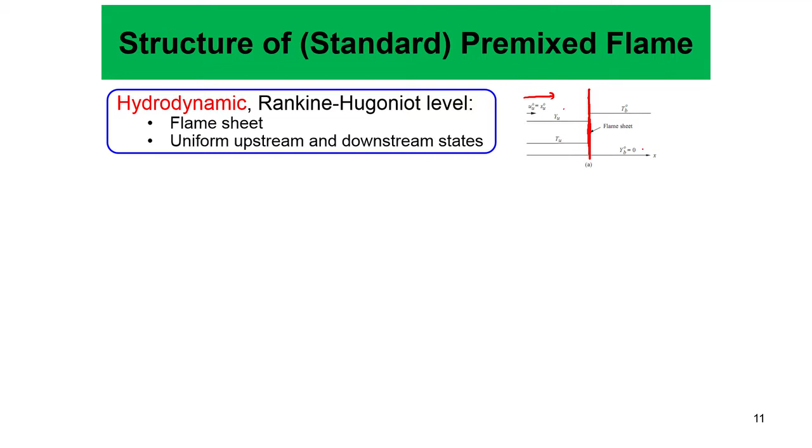Okay. So, it means that we are viewing the flame from a very far distance, where we are not really looking into what happens inside this sheet. But then if you put a magnifying glass and zoom into this sheet, you see that the sheet essentially has a finite thickness. It has a diffusion zone or a preheat zone where the temperature actually increases. So, if this is the unburnt gas temperature, this is the burnt gas temperature, and there is a region where the temperature sharply increases. This diffusion zone is characterized by LD0. Okay. And the reaction zone is essentially frozen due to the large temperature TA, and we again consider this reaction sheet limit, where the reaction happens over a very small distance because of the large activation energy that we have already seen.

But there is also a mass diffusion zone where the species does not change abruptly, which is not possible in reality because everything has to change in a gradual manner. It only depends on the perception of length scale. So, when you zoom into this flame sheet, you see this preheat zone and the diffusion zone, but our zooming capacity is still not enough to look into the reaction sheet. But if you zoom in further, okay, you will see that there is also a reaction sheet which also happens over a small and finite distance or finite length.

So this additional reaction zone, this LR, which is this thickness, that is where the temperature increases like this, and the species decreases like this. This is where the reaction is peaking, and that happens over a length of LR0, and LR0 is because it is standard conditions we are considering, and this is the LD0.

So this is the flame structure, the 1D flame structure in the x direction. Of course, in a gas turbine engine you can have a flame like this, these are the swirlers. You can have a flame like this in an actual gas turbine combustor. So basically, if this is our x direction...

Here what we will see is that whatever happens in this thing essentially happens like this: the temperature increases like this, the species decreases like this. So we need to understand this flame structure to know how the flame structure in an actual engine behaves. This idealized version is very important, but understand that this flame structure can be considered as a building block or an element of the complicated flame structure that happens in an actual engine, just like the chambered flame is an element of the complicated flame structure that can happen in some other non-premixed combustors. So this type of understanding is very important.

But even without going into the details, we can now understand that because the activation energy is very large, your LR0 must be much smaller than LD0. So this is one important thing.

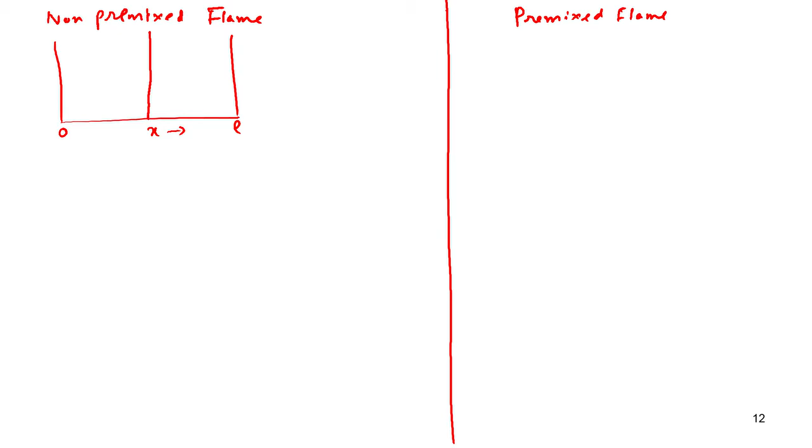So then we need to understand the difference between the temperatures for the non-premixed flame and the premixed flame. If we consider the non-premixed flame on the left hand side, and on the right hand side we consider a premixed flame, the non-premixed flame was like this, both are 1D variations. This is 0, this is L, this is X. The flame was somewhere here. This was your temperature T0, TL. This was YF0, just the previous thing that we did.

Nothing can survive, no fuel. This is the fuel mass fraction on the left hand side, because it can contain some inert nitrogen also, and no fuel can survive beyond the flame. This is the flame location XF, and this was your YOL, the mass fraction of the oxidizer on the right hand side.

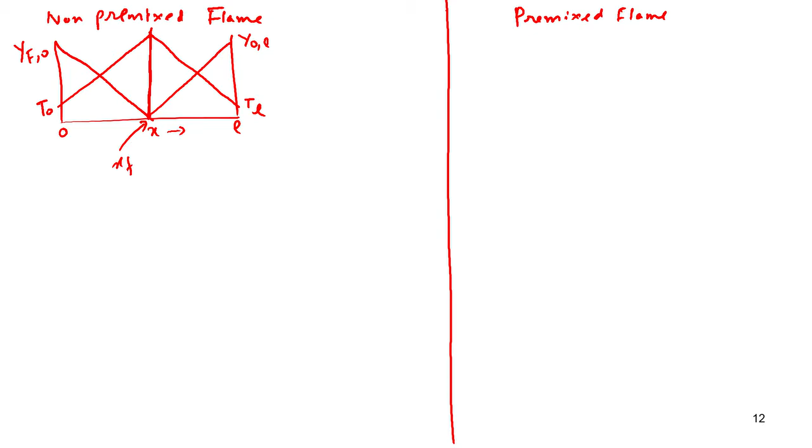And these things were linear because it was just diffusion controlled. By coupling function, this becomes the solution of the Laplace equation, del-squared beta-i over del-x-squared equal to 0, and the temperature formula that we obtained was this.

Okay, so what happened was that this was the heat release, and this is a fuel mass fraction. So if we consider 1 kg of fuel mixture, this was the amount of heat release.

So this is what we had obtained exactly in the previous class. As a result of this TF, what we obtained was the adiabatic stoichiometric flame temperature for the system. Okay, so now if you say that YF0 is equal to 1.

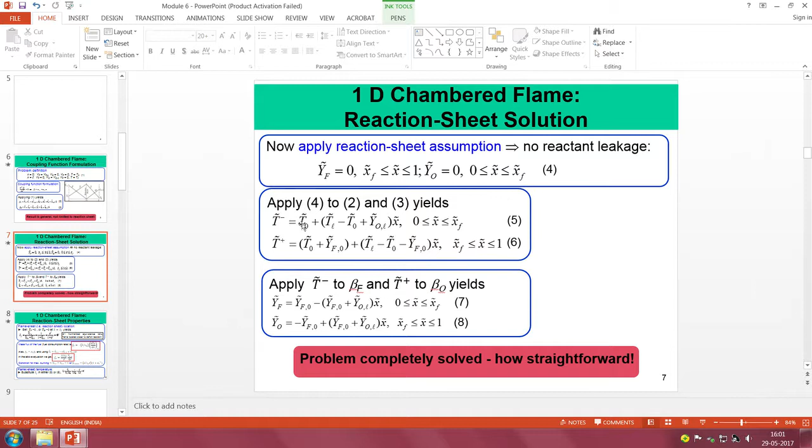Just to show you back, this is how we obtained this. If we just go back to the previous class in module 6, this was the thing that we obtained. This was the temperature equation that we had. And then when we substituted this thing into the XF that is here, that is the XF value that we obtained here, this is the temperature formula that we got.

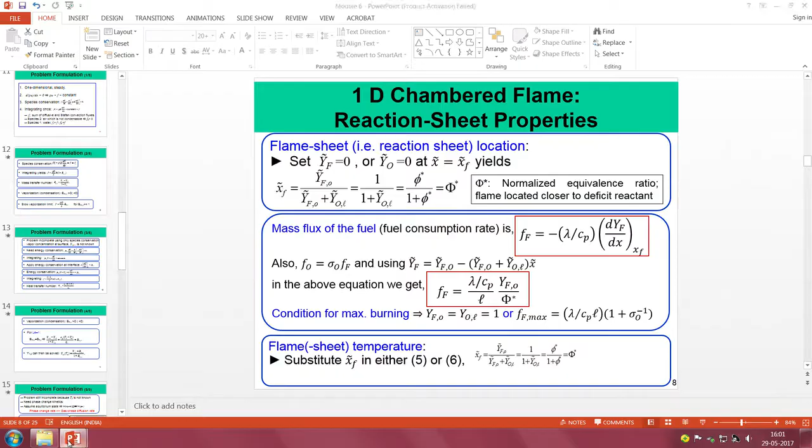And this thing was exactly the amount of air. This is we obtained in this manner. I'll just go briefly over this because this was so important, that is 1 kg of fuel air mixture contains...

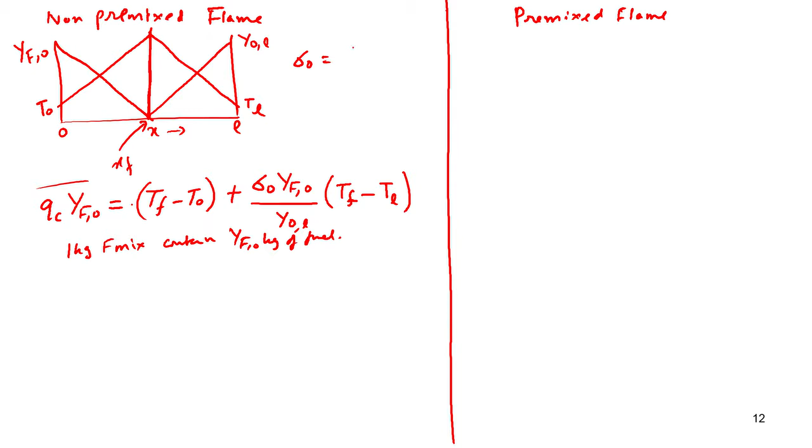YF0 kg of fuel, right. Now for stoichiometric burning, whereas this sigma 0 was nothing but W0 times nu 0 double dash minus nu 0 dashed, divided by Wf times nu f double dashed minus nu f dashed.

So for stoichiometric burning, W0... 1 kg for stoichiometric burning, sorry, this is Wf times nu f double dashed minus nu f dashed kg of fuel needs this W0 times nu 0 double dashed minus nu 0 dashed oxidizer, oxygen, right.

So YF0 kg of fuel needs W0 times nu 0 double dash minus nu 0 dashed, divided by Wf times nu f double dashed minus nu f dashed, kg of oxygen times YF0, right. So this is nothing but, for stoichiometric burning, YF0 kg of fuel needed sigma 0 times YF0 kg of oxygen, right.

Alright, so as a result, this thing was exactly the amount of oxidizer mixture, that is air, required for stoichiometric burning. So you see, if we just remove all these things, the thing which comes out is that this heat release goes on to support heating up 1 kg of fuel mixture and exactly the amount of oxidizer mixture required for stoichiometric burning of this fuel mixture. So the burning that is happening is stoichiometric. So when the burning that is happening is stoichiometric, then the flame temperature reached is nothing but the adiabatic flame temperature.

So here the most common situation is that the fuel does not contain nitrogen, say it is pure fuel. So here this QC is equal to, then it means your YF0 is equal to 1 if it is pure fuel, that is there is no oxidizer, but of course the air will contain some nitrogen. So then it means essentially QC is equal to TF minus T0 plus sigma 0 by YOL times TF minus TL, right. So this temperature thus obtained is the phi equal to 1 adiabatic flame temperature. It is always at the peak, this flame temperature.

On the other hand, if you consider the premixed flame, that is this structure, this is your flame sheet, this was also your flame sheet where your XF here is. So here your fuel and oxygen mixture are premixed, right, and this your fuel mixture is YU. 1 minus YU is equal to essentially your air mixture or the oxidizer mixture like this, okay, and your species is reducing like this. Here is your flame sheet, okay, thin.

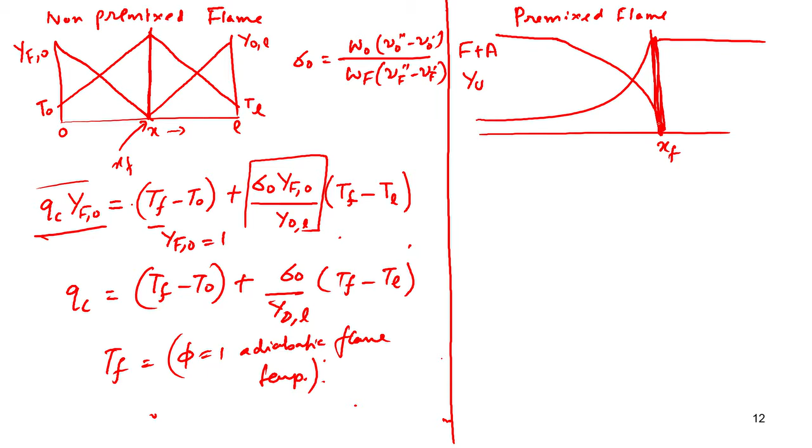So here the temperature thus reached is Cp times (Tf minus Tu), or we call it Tb minus Tu, which is equal to QC times YU.

Now on this side, YF0 you could set to 1 whenever there is no nitrogen in the fuel, which is most likely the case. Then the fuel mass fraction equals 1, pure fuel going out. So with pure fuel, the flame temperature is the phi equal to 1 adiabatic flame temperature. But this YU here can never be equal to 1. The reason is that 1 minus YU equals your mass fraction of the oxidizer, or the air. YU can never be 1 because this is mixed with the oxidizer. So it is always less than 1.

As a result, this temperature is still the adiabatic flame temperature because there is no heat loss. But this is the adiabatic flame temperature at a given phi, which is a function of your YU.

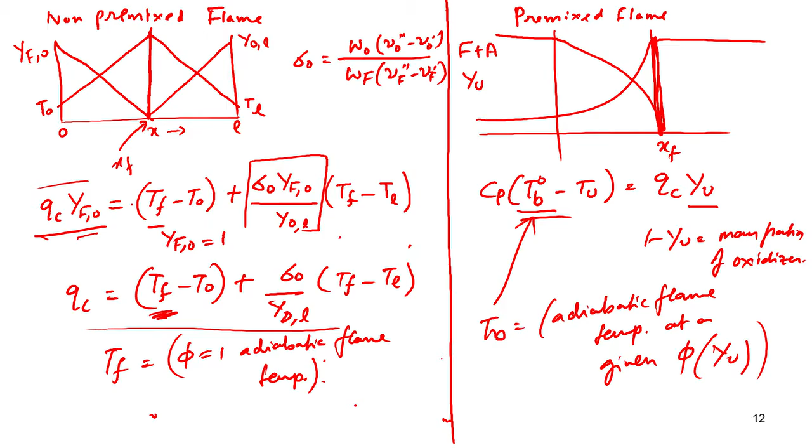So depending on the equivalence ratio, you can essentially control your TB or TB0. That is the difference here: you cannot control TF. TF is always the stoichiometric adiabatic flame temperature as long as it is a pure fuel. On the other hand, here just by changing the stoichiometry, putting in less fuel or more air, you can control the flame temperature.

That is why premixed flames are very attractive in engineering applications. It allows you to engineer the flow inside, or engineer the product composition and the product temperature, because temperature is very important.

You have seen that when you consider thermal NOx production in the Zeldovich mechanism, this N2 could only be split up at very high temperature. So vice versa, whenever there is high temperature, this N2 can be split up by oxygen.

So to reduce emissions, unless there are other pressing needs, you always want combustion to happen at a temperature of about 1600 to 1700 Kelvin. You can readily do that with a premixed flame, where you just control the equivalence ratio and get the low temperature.

Of course, there are challenges associated with it, like flame stability and thermoacoustic oscillations that we have to deal with. But unlike in a non-premixed flame where you cannot control the adiabatic flame temperature, here, as long as your fuel is pure but mixed with air, giving in less fuel gives you less temperature. You can appropriately control the flame temperature, and also control things like emissions. So that is the advantage.

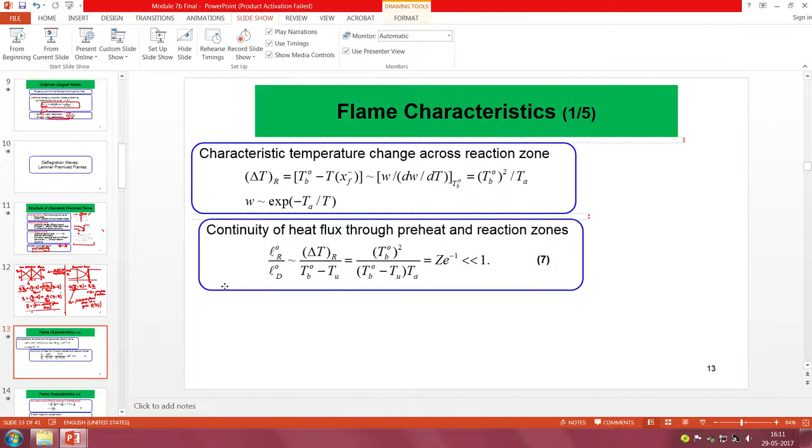So then we go into the flame characteristics. One very important characteristic to note: if we consider the premixed flame structure, where the reaction zone has temperature TB0, this is your TU, this is your LR, and this is your LD, LR0, LD0. If we want to find the relation between LD0 and LR0, we want to find LR0 by LD0. So we have to find out what LR0 is.

We go into the simpler description, the flame sheet limit, where we consider there is a finite thickness but we do not resolve the structure. So this is your LD0, this is your LR0. By similarity of triangles, this is your TB0 and this is your T at XF minus, which is just prior to the flame, and this is basically your reaction zone.

So the temperature after combustion reaches the burnt gas flame temperature, which is the adiabatic flame temperature at that given equivalence ratio, with a small thickness which is the reaction zone thickness LR0, and just before the reaction zone the temperature is slightly smaller than TB0. So we need to find the ratio of LR0 by LD0, the reaction zone thickness to the diffusion zone or preheat zone thickness, by applying similarity of triangles.

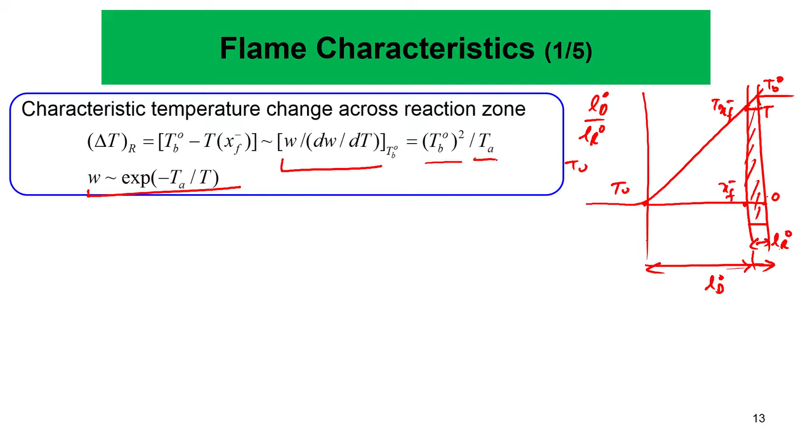That is W is proportional to e to the power of minus TA by T. We will consider that we just take this derivative and find that it essentially becomes the ratio of TB squared divided by TA, whereas TB is the burnt gas flame temperature and TA is the activation temperature.

So we can just find this out, and then we apply this thing, that is LR0 by LD0 is essentially delta T across the reaction zone divided by delta T, TB minus TU, and then we substitute this here, and we get LR0 by LD0 is essentially equal to TB0 squared divided by TB0 minus TU, times TA, whereas this thing is a very important quantity.

And that is called the Zeldovich number. So this guy is called the Zeldovich number, and it is a very important quantity, and the Zeldovich number is always very large. You see that in the bottom you have a very large quantity which is TB0 squared.

On the numerator you have TB0 minus TU, which is proportional to TB0, but since TA is much larger than TB0, the activation temperature is much larger than the burnt gas flame temperature, which comes from kinetic considerations, that's why your activation temperature should be large, because only a small fraction of the molecules should be excited to start the reaction. So this TA is very large, and they should have a very large energy, and as a result the Zeldovich number is very large.

The inverse of this is much greater than 1, whereas 1 by Zeldovich number should be much less than 1. So essentially we see that LR0 by LD0, which is equal to 1 by Zeldovich number, should be much smaller than 1. So this is the consideration that LR0 by LD0 should be much smaller than 1.

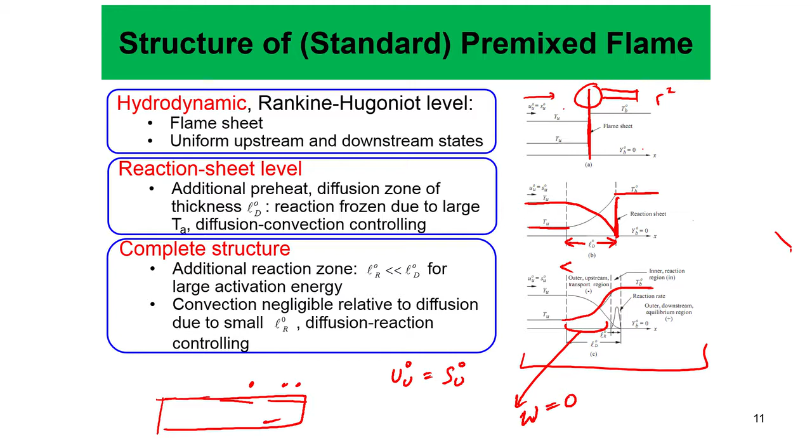Now we can go into balance of the diffusion and convection, and the diffusion flux balance in the preheat zone. You see that in this structure, in this zone of LD0 there is no reaction, W equal to 0, and in this region this is how the temperature increases. So in this region we can consider the reaction rate, the species-independent reaction rate or the species production rate, that is equal to 0.

So that is equal to 0, and this is just like the previous relations that we used while deriving the coupling functions, because even the flame essentially means reactions, but because the activation temperature is very high, as a consequence your Zeldovich number is very large, and as a result your reaction zone thickness, that is LR0 where the reaction happens, is much smaller than your preheat zone thickness. So in a lot of flames, under this assumption there is no reaction happening, it is only balance between diffusion and convection.

So if there is balance between diffusion and convection, we can consider this equation, the one dimensional temperature equation, which is F0 times Cp dT/dx minus lambda d2T/dx squared equal to 0. Then if we do an order of magnitude analysis, we say that this is represented by F0 Cp, where this happens is essentially delta T, which is equal to Tb minus Tu divided by LD0, that is the diffusion length, and that should be proportional to or have the same order of magnitude as lambda times delta T divided by LD0 squared.

Okay, then this cancels, and your LD0 is nothing but lambda by Cp times 1 by F0, or your F0 is nothing but lambda by Cp times 1 by LD0. So this is a very important relation, that F0 times LD0 is essentially proportional to lambda by Cp, which is your thermal conductivity divided by specific heat.

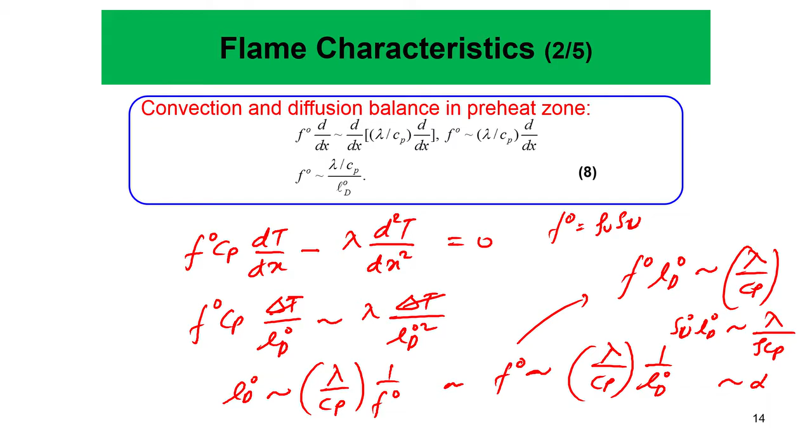Of course, F0 is essentially equal to rho u times SL, so you can also write that SL0 times LD0 or SU0 times LD0 is proportional to lambda by rho Cp, which is essentially equal to thermal diffusivity. So SU times LD0 is equal to constant, equal to thermal diffusivity, and that arises just from the fact that in the preheat zone it is just a balance between convection and diffusion, and there is no reaction at that place.

So that is the consideration with which we arrive at this. Now, whatever flux F0 goes in through this convective-diffusive zone, that must also be reacted. So if you remember the dimensions of the reaction rate, we can also relate your F0 essentially to the WB0, the species production rate at the burnt gas temperature, times LR0. That is how you dimensionally connect F0 with the reaction rate.

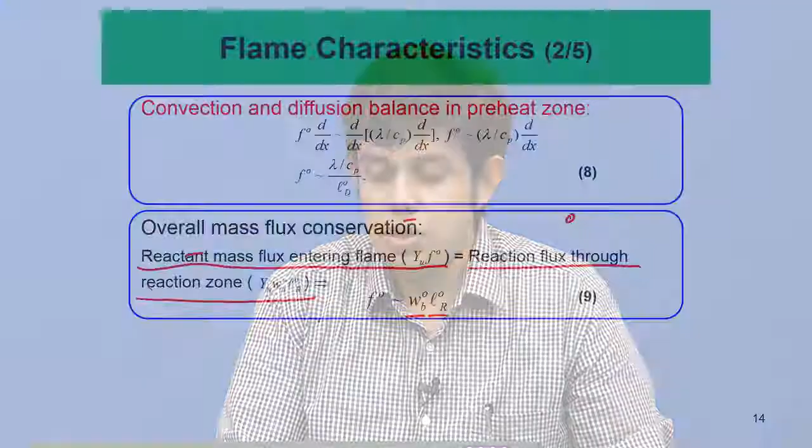So the assumption is that the reactant mass flux entering through the flame, that is Yu times F0, is equal to the reaction flux through the reaction zone, which is Yu times Wb0, because that is the species consumption rate, times LR0. When you equate these two, Yu times F0 equals Yu times Wb0 times LR0, this cancels, and your F0 is nothing but Wb0 times LR0.

So now what you can do is relate this guy with this guy. What you can do is just multiply these two things, and you will get F0 squared is equal to lambda by Cp times Wb0, that is the reaction or species production consumption rate at the burnt gas temperature, times LR0 by LD0.

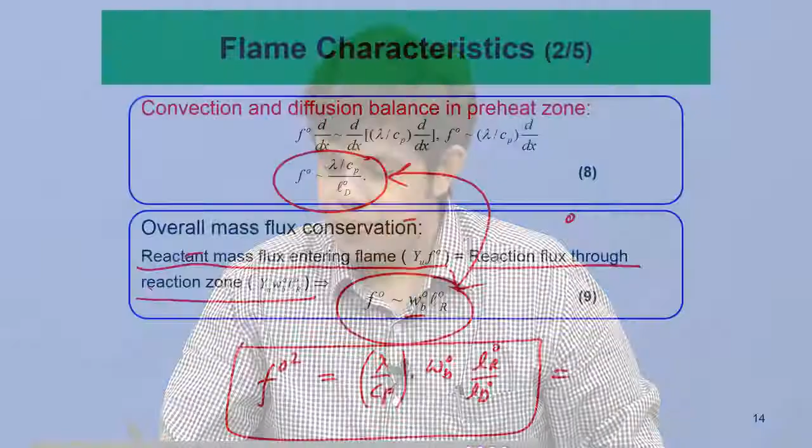This is a beautiful relationship that emerges, by very simple considerations, just by considering the species flux, just by assuming that the species flux that travels to the preheat zone, that is the convective-diffusive zone, also has to be consumed in the reaction zone. So from that this relationship emerges, and do you see what it is? This is nothing but lambda by Cp, the thermal diffusivity without the density, times Wb0, and LR0 by LD0 is nothing but 1 by Zeldovich number.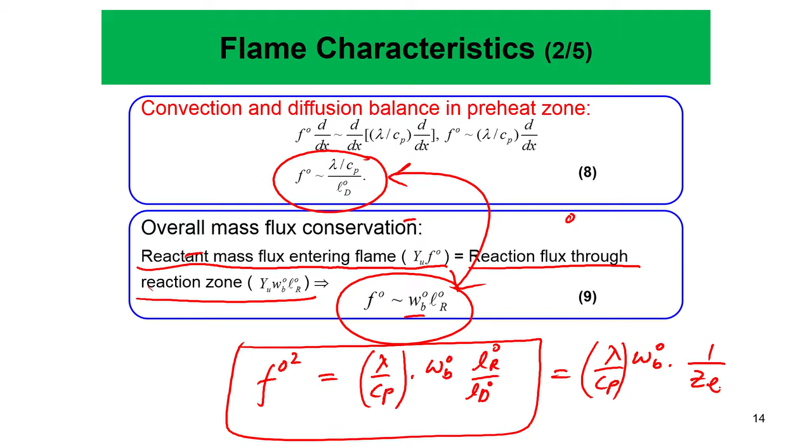So then this emerges, that your F0 squared, the burning flux squared, is essentially lambda by Cp times Wb0 divided by Z, the Zeldovich number, or you can write it as F0 is essentially square root of lambda by Cp times Wb0 divided by Zeldovich number to the power of 1/2. So here you get plenty of information about premixed flames.

That means F0 is essentially the geometric mean of lambda by Cp and Wb0. So it means that in a premixed flame, lambda by Cp and Wb0 are both equally important, both diffusion and reaction are very important, and that is why the premixed flame is much more sensitive to chemical reaction mechanisms and everything.

Whereas in a diffusion flame, which is basically diffusion controlled, you have seen that F0 is essentially proportional to lambda by Cp. In a non-premixed flame, or in a chamber flame, you have seen that it was proportional to lambda by Cp times the velocity, the species gradient, etc. But here it has r to the power of 1, here it is to the power of half.

So of course here the importance of diffusion has gone down at the cost of chemical reactions. But this thing has to be always remembered: this is the first order calculation, a very basic calculation which yields this analysis, but it's very important.

We will go into more sophisticated analysis later to arrive at this again, but this itself gives a lot of information. It says that F0, the burning flux, is proportional to the square root of the thermal diffusivity without the density, and is also proportional to the square root of the reaction rate at the burnt gas temperature, and also inversely proportional to the Zeldovich number to the power of half.

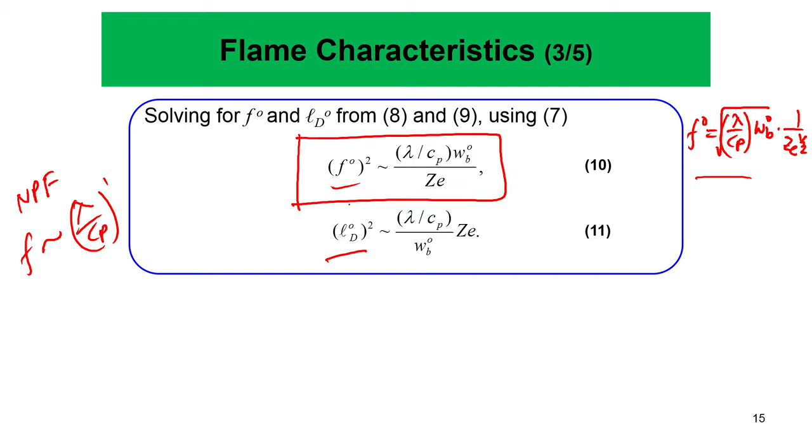So all these things give very important information, and this F0 is now used to close the Rankine-Hugoniot relation, where m was not specified. So this result shows three fundamental quantities governing the flame response.

Lambda by Cp is a measure of diffusion, WB0 is a measure of reaction, and Zeldovich number is a measure of activation, because Zeldovich number is essentially Ta times Tb minus Tu divided by Tb0 squared. So this is a measure of essentially the activation energy and the exothermicity Tb0. These three things show how the premixed flame actually responds.

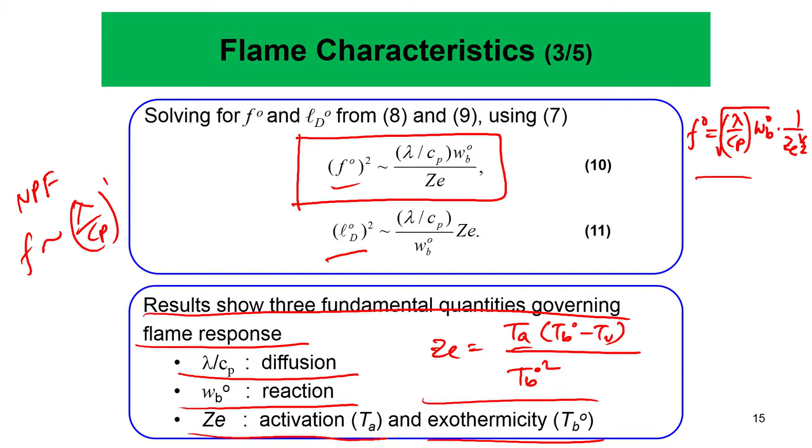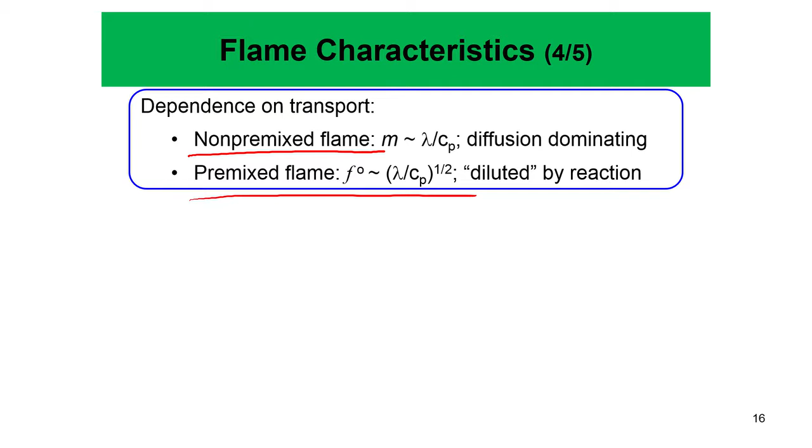The response of premixed flames is more rich in terms of response rather than a non-premixed flame because of these things. As we have seen, in the non-premixed flame the burning flux was proportional to lambda by Cp, which says it was diffusion dominating only, and here your premixed flame F0 is equal to lambda by Cp to the power of half, because your reaction is also equally important, also proportional to the power of half.

So, as a result, what you have seen is that F0 is essentially proportional to the square root of lambda by Cp times WB0, or the propagation rate as a response of the flame, which is the geometric average of the diffusion and reaction rates, which are the driving forces in forming the flame.

And here of course we can say that F0 times LD0 is equal to lambda by Cp, which depends only on transport, whereas F0 by LD0 is equal to WB0 divided by Zeldovich number, which depends only on reaction.

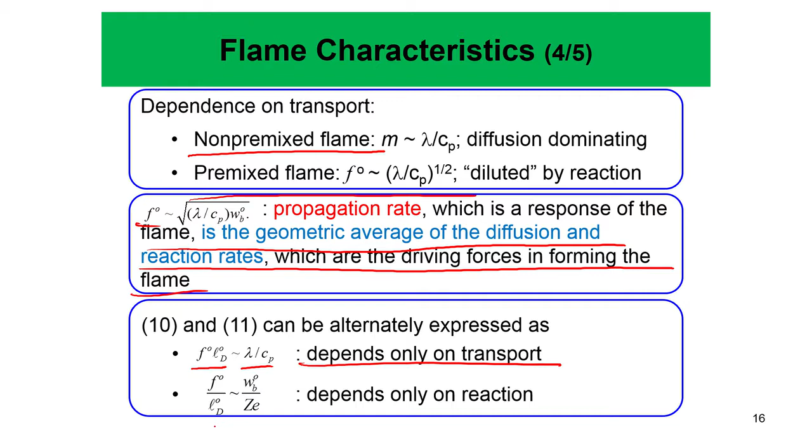So, to end this discussion on flame characteristics, as we have seen, there are only two controlling processes: diffusion and reaction. The flame characteristics are described by two independent relations, which can be expressed in three different ways to convey different messages.

So, if we just consider the balance of the processes, that is the balance of the convective and diffusive fluxes, you obtain F0 is equal to lambda by Cp divided by LD0. Whatever is flowing, this flux has to be consumed if there is complete combustion, and of course which is the case, and F0 is essentially WB0 times LR0, where LR is the reaction zone thickness.

And then we can combine these two to find an explicit relation for the responses, where F0 square is equal to lambda by Cp times WB0 divided by Zeldovich number, and LD0 square is essentially lambda by Cp divided by WB0 times Zeldovich number.

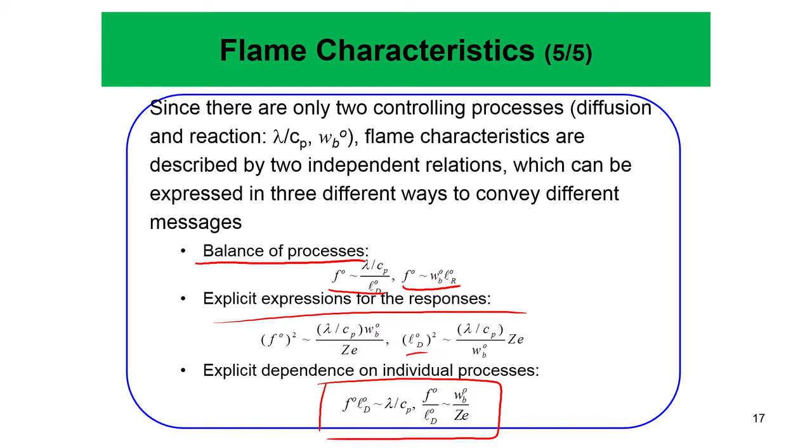And when we do the explicit relationships, we can find this sort of thing by considering only the diffusive or reactive properties: F0 times LD0 is only dependent on diffusion, whereas F0 by LD0 is only dependent on reaction.

So then the question comes: how does your F0 or SL depend on pressure? Now, we know that WB0 is governed by the law of mass action, where the reaction rate should be proportional to the product of the concentrations raised to the power of the stoichiometric exponents, and we can also alternatively write this concentration as proportional to the pressure.

So we can write WB0 as proportional to P to the power of n, where n is the reaction order. Now, we have already known that F0 is equal to lambda by Cp times WB0 to the power of half, whereas WB0 is essentially P to the power of n. So this gives you a P to the power of n by 2 dependence.

So F0 is essentially P to the power n by 2. Now SU0, which is the burning speed or the flame speed or the burning velocity, SU0 is proportional to—essentially this rho u times SU0 is equal to F0, that is a flux. So this is equal to this.

So it essentially becomes once again P equals rho RT. So your P, rho u is essentially proportional to pressure, that is upstream density, but there is no temperature variation, so we can do this. So F0 by P—this part gives you a P to the power of n by 2 dependence, and this part gives you a P to the power of minus 1 dependence. So this gives P to the power of n by 2 minus 1 dependence.

And then of course, since LD0 and F0 are connected, we can connect these two also, and that gives you a P to the power of minus n by 2 dependence.

So you see that burning flux always increases with pressure as long as n is positive, which is the case. But you see that in the burning flux you also have density built into it. So it also increases because your gas is more dense, so more mass flux is consumed, that is why it is dependent on pressure.

When you take off the dependence on density, this burning velocity has an n by 2 minus 1 dependence. So whenever n is greater than 2—when n is equal to 2 it becomes pressure insensitive, and in other cases when n is equal to 1, it actually decreases with pressure, as we will see later that SU actually decreases with pressure, whereas F0 actually increases with pressure.

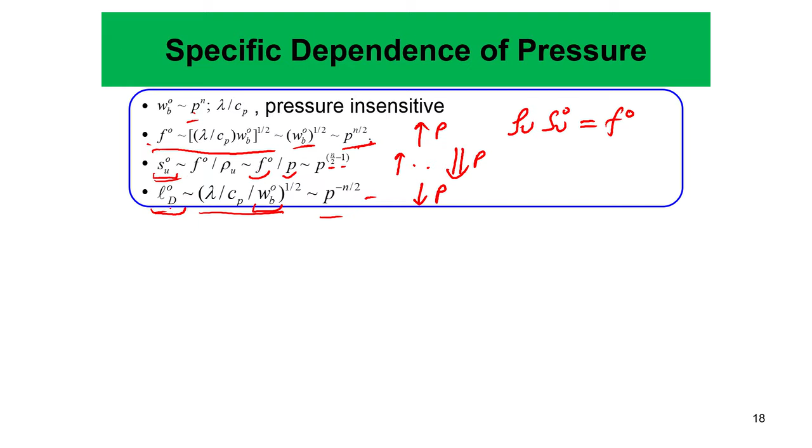LD0, the flame thickness, corresponds with pressure—higher the pressure, the flame thickness becomes smaller.

This gives you an idea about the challenge in computations also, because gas turbine engines or other aero engines operate at high pressure, since only at high pressure can you add heat and get work done. Now at high pressure, your LD0 reduces with pressure, so if you want to do a high pressure simulation, your flame thickness becomes very small. You need more and more grid points, or if you're an experimentalist doing optical diagnostics, you need more camera resolution to image the flame thickness. This gives you a very challenging task to model flames at high pressure.

As we have discussed, for n equal to 2, f is not a function of pressure—this is a cancellation between density and reaction, but this is not a fundamental result. For n between 0 and 2, f increases with pressure but SU decreases with pressure, which is mostly the case, whereas the dependence of LD on pressure is through reaction, but not through diffusion.

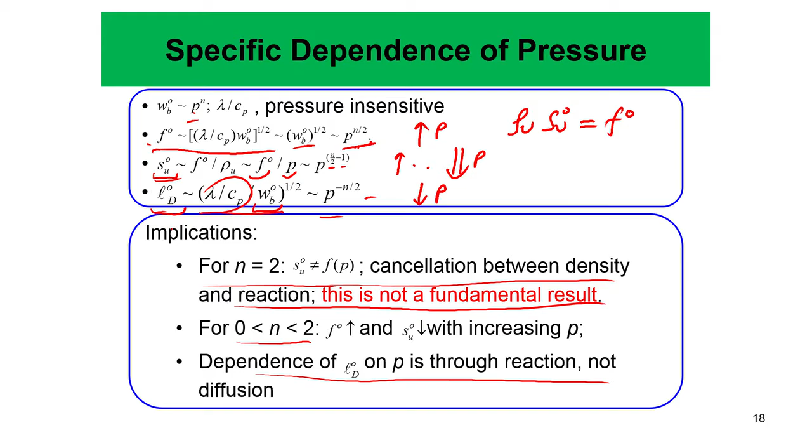Because lambda by Cp does not depend on pressure, as a result your LD0 invariably decreases with pressure.

With that we will end this class, and then we will go into analysis of the governing equations to derive the flame speed in a more rigorous manner. Here it was done more phenomenologically. You can ask why do it in a more rigorous way—because when you do things in a mathematically detailed manner, all the properties of the flames become much more clear, and it will tell you whether this analysis we have done is correct or not. But to gain more understanding, one needs to do a detailed rigorous analysis, which we will do in the next class.